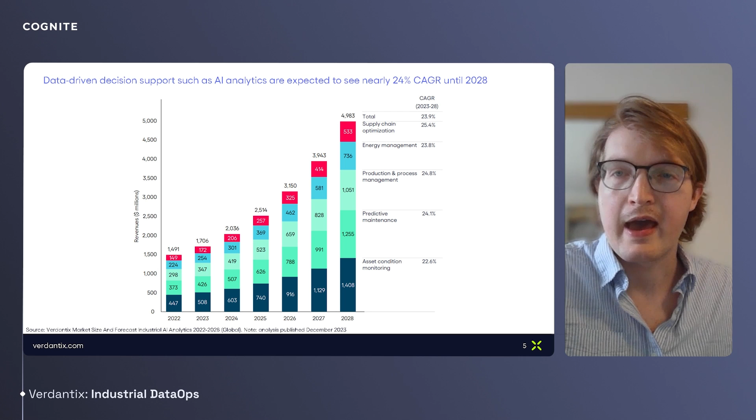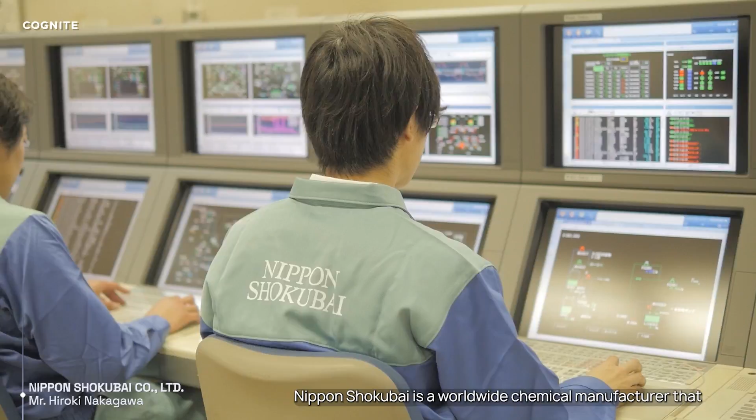NIPPON SHOKUBAI is a worldwide chemical manufacturer that provides materials and solutions required by people and society, from super-absorbent polymers, raw material of detergents, automotive paints, and other consumer goods to next-generation batteries and health and medical materials.

In my current role, I am responsible for promoting digital transformation at NIPPON SHOKUBAI.

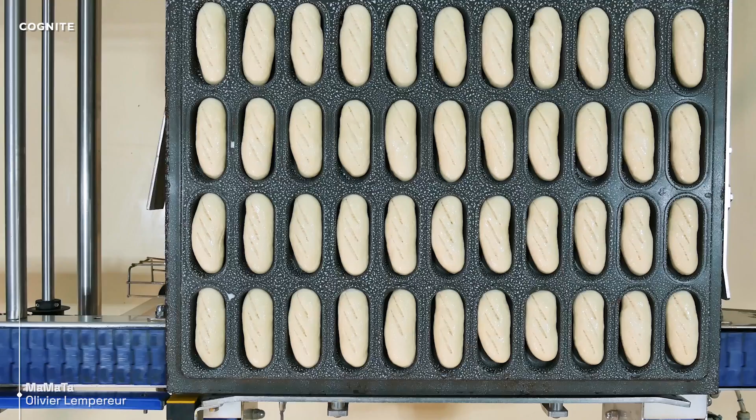MaMaTa is a subsidiary of the same group as Mecatherm, a leading OEM in the industrial bakery sector. So they are our main focus to date, and we provide them with our tool to help them better understand their equipment and as a way to stay close to their remote clients.

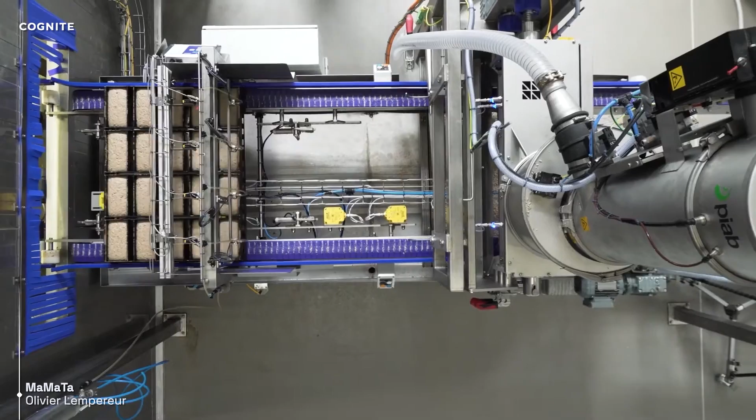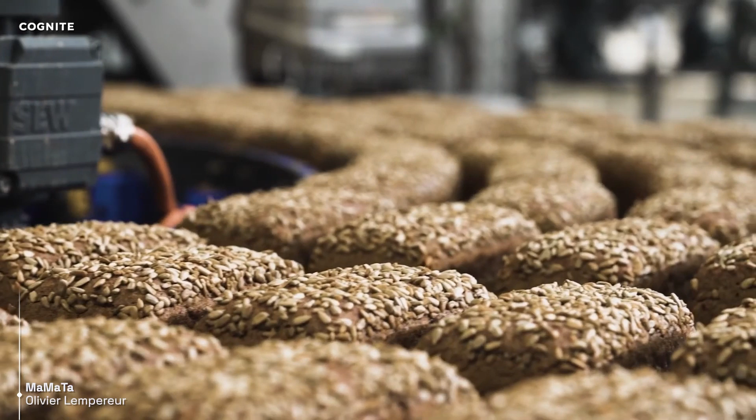There's a saying that in every machine, about 70% of the functions have been reused from other equipment, and only 30% are very specific. Our objective is to take that into account so that the knowledge we create about a machine, a function, or an actuator is immediately linked to similar assets, enriching the whole knowledge graph.

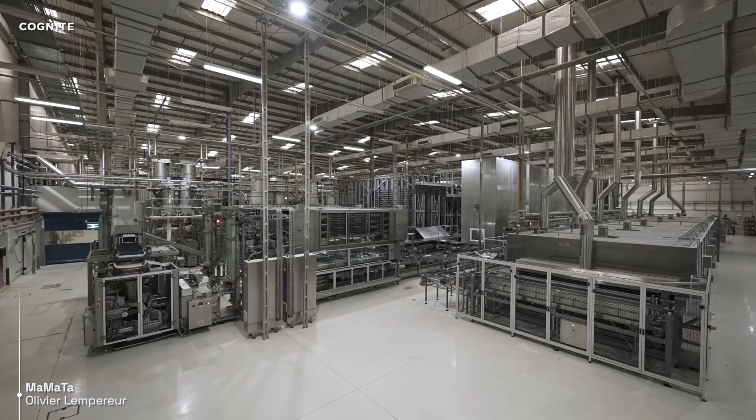As an example, a baker would be surprised to learn that a glass wool insulation panel is also processed using proofing and baking. Therefore, every machine we connect should be considered a modular, configurable system.

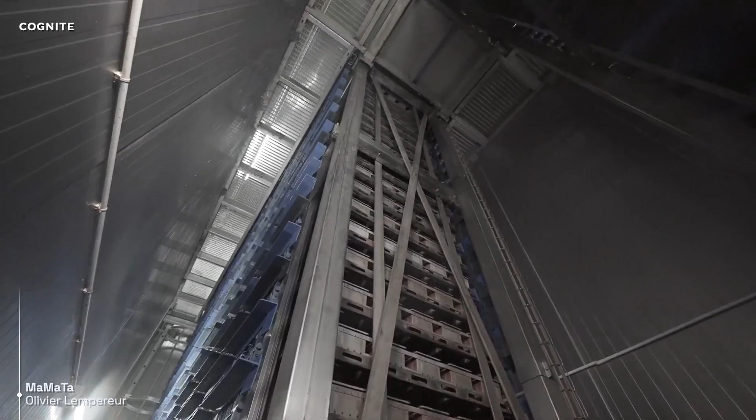Connecting new equipment should be a breeze, and valuable information should start flowing immediately, especially for the standard components or functions.

To meet our objective, we explored various platform solutions, but we encountered several issues. Many options were no-code platforms that were not powerful enough or simply not designed with industrial use cases in mind. They also lacked flexible data modeling tools, which was a significant drawback for our needs.

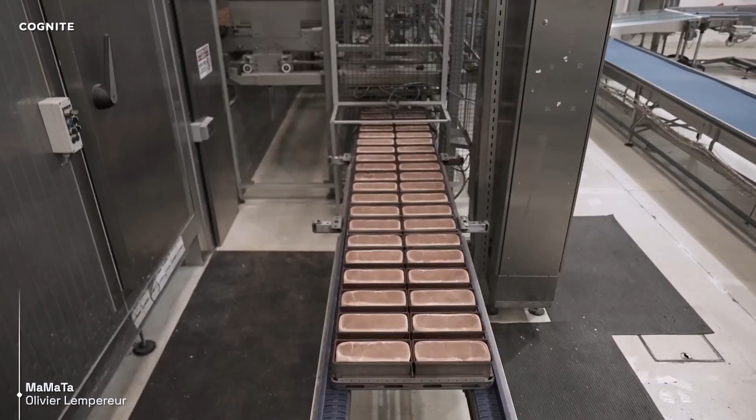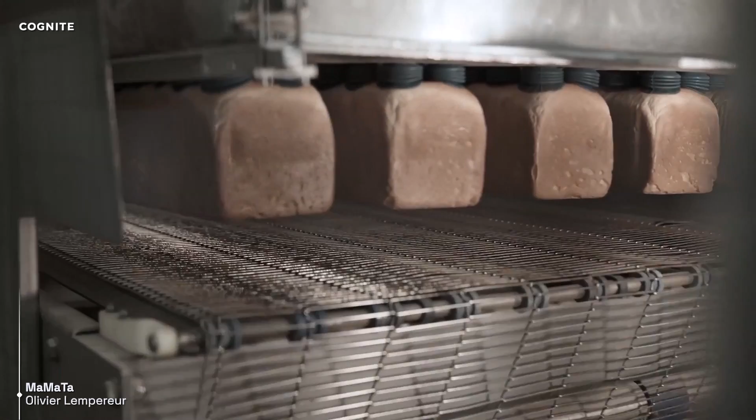Additionally, connecting new equipment or a new production line was a very tedious and time-consuming task. The data processing capabilities were often limited, usually just offering a basic functional library. And finally, there was no room to convert shop floor stories into structured data, which is essential for our operations.

To address the challenges I described, we decided to choose Cognite Data Fusion, and I'll share with you some of the things we have done with the platform. So let's begin with the data modeling service.

Data modeling is important for MaMaTa because it allows us to create a place for every piece of data we collect, be it a time series or a piece of knowledge shared by a subject matter expert. With our previous platform, we were limited to sites, lines, and equipment to store all the data. Now we have a much more complex data model, and you can see that we can store very detailed information about a specific equipment, but in a standard way.

For example, we have our own definition of a process equipment, which for us is always made of a conveyor part and a process part. And here you can see that we model things up to the motor and its components.

Now let me show you how we work with Cognite charts. Once the data is stored in the data model, we begin to work on the understanding of that data. For that, we use charts. It's like our prototyping playground.

For example, on that stone oven, we can see that the cylinder on the left-hand side of the conveyor, which is used to tension the chain, is not behaving as expected. It should be as smooth as the one on the right-hand side. A subject matter expert would tell us that it is because the chain on that side is becoming stiff due to a greasing problem.

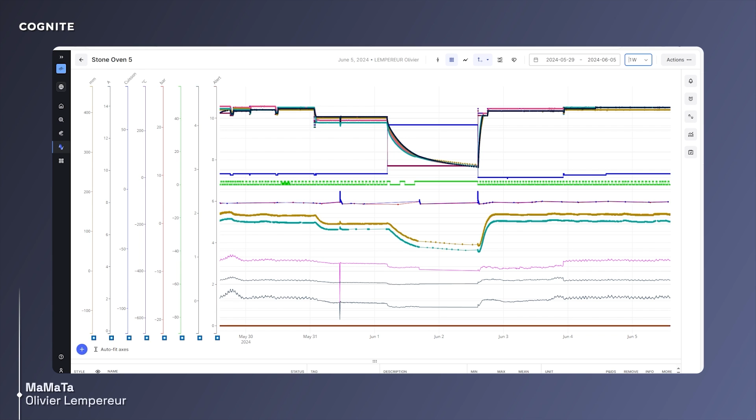On that similar oven, I'm surprised to see that the motor current is oscillating. But I'm curious to find out at what frequency in order to understand what component is involved. For that, let's move on to an app that we developed on Streamlit inside CDF.

In this app, we can calculate the fast Fourier transform of our oven motor current. It is valuable for us to be able to use this advanced diagnosis tool that we created without ever leaving the platform. By the way, we can immediately see that things were different at the beginning of May from what they seem to be right now.

We would have to investigate with the expert to what we could link the increase of amplitude that we can see, but I can already say that this will be interesting to monitor in the long run.

So we will work on packaging that as a function that will run on CDF. It will eventually generate its own time series and, if necessary, also some alerts that would be sent to shop floor workers through our customer portal.

Finally, let me show you the front end that we built to deliver actionable insights to people at MaMaTa and on customer factories in a user-friendly way. On that portal, we can present the same data, but in a very refined and contextualized way.

For that, using the API and the SDK available was a game changer. We are able to easily pull data from CDF to visualize it on the portal and create a compelling user experience.

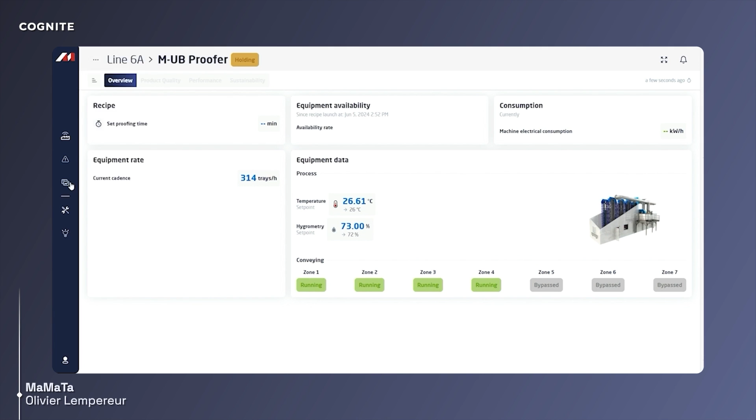The alert that we were talking about would end up here. Of course, most of the data we are collecting is also available. For an asset like the proofer, the key indicators can be seen at a glance.

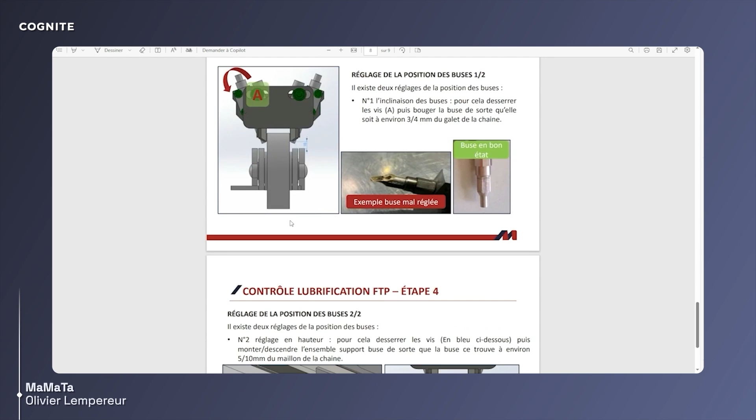But the main point for us is that everything from collecting a new measurement on an asset to the data being available through the API is very quick, so we can answer a new need expressed by one of our customers in a very agile way and improve our solution rapidly.

So far, we've managed in 3 months to get from no platform and no front end to a first site connected and its data available in the first version of our customer portal.

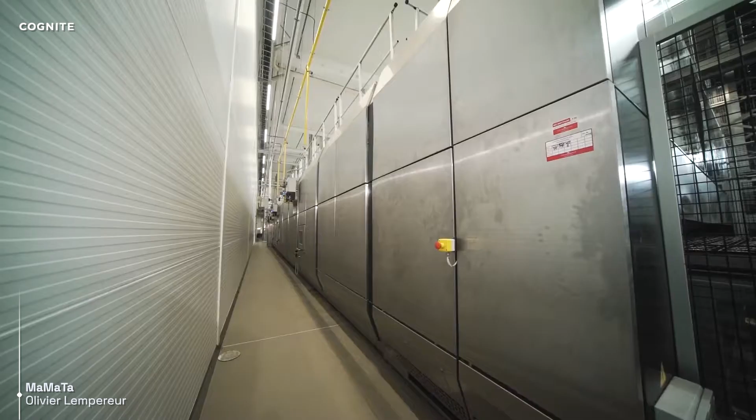Everything is now in place to accelerate, connect more assets, and develop the whole solution to offer even more value to people at MaMaTa and on bakery production sites. Being able to offer our digital solution to prospects has already allowed us to defend our margin in a recent contract win.

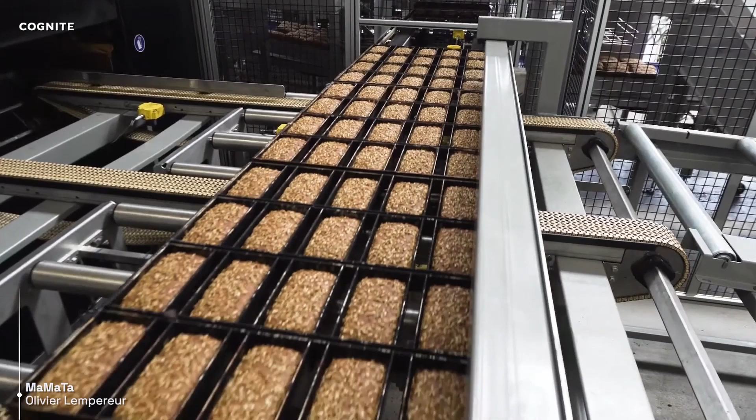We also want to take advantage of the GenAI capabilities in CDF to present knowledge in a more natural and intuitive way. One thing I envision is dynamically adapting the content based on the user's profile, tailoring it to their level of technical expertise.

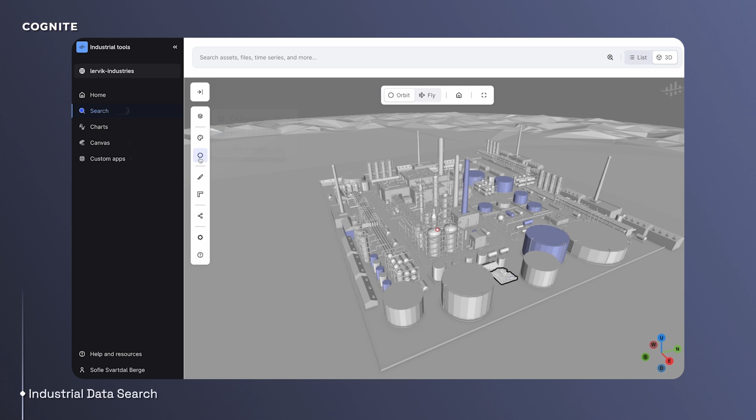You can also highlight contextualized assets in 3D. Clicking on any of these contextualized objects gives you a summary card, and you can either jump into more details or also view side by side with the 3D model, for instance, the associated P&ID.

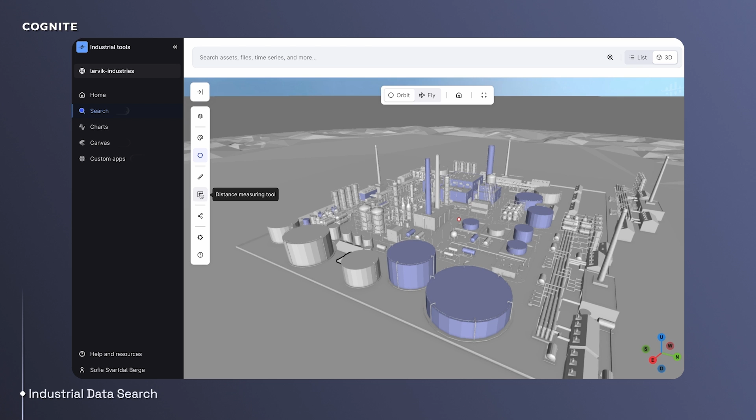Other functionality includes using the measurements tool to perform spatial analysis, like analyzing the need for scaffolding to reach a specific area, or whether there will be room for new equipment you're planning for. You can measure point-to-point, multi-point, area, and volume.

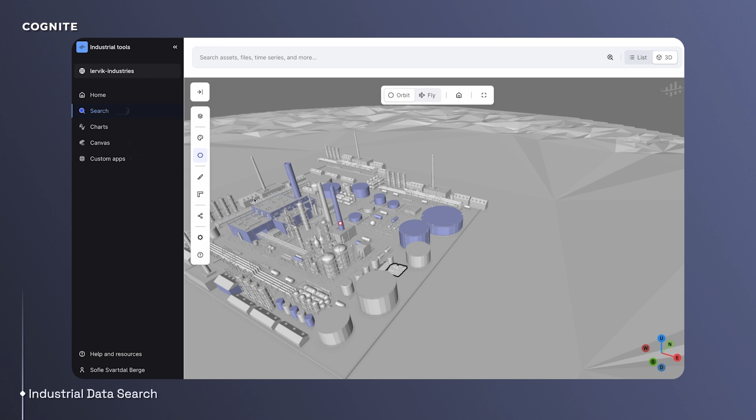Lastly, we can't miss covering how we can use color overlay functionality. With color overlays, assets in 3D are colored based on threshold rules, single or nested, that you have created to monitor various equipment or operational conditions, like the level of corrosion or pressure changes.

When you turn on color overlay here for monitoring of compressor health, it will highlight any objects in 3D that are violating that threshold. And we can see here that there's one compressor that needs attention.

For troubleshooting, you might also want to access this data out in the field from a handheld device. And you can. Similar to the desktop experience, Cognite Data Fusion enables field workers to find and interact with the same set of contextualized data from their handheld device, bringing more efficiency and ease of work out to the field. On your handheld device, starting with the search mode, we can look for the same first stage compressor using the search field.

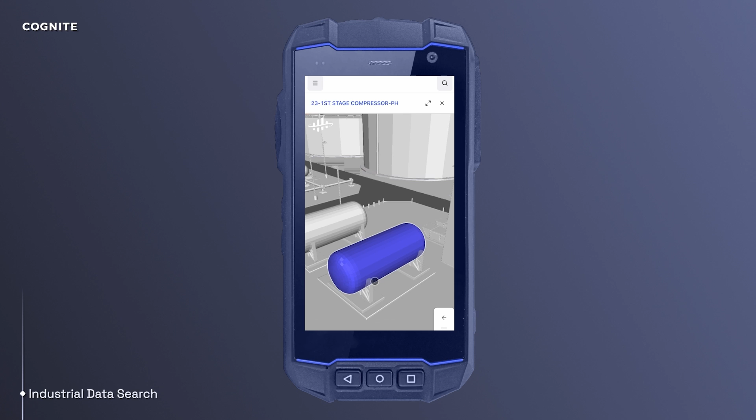Finding the equipment, you can see associated data, including interacting with this high-performant web streaming of contextualized 3D models that lets you as a field expert fully interact with 3D content, even on low-powered devices, making navigating unfamiliar areas and inspecting hard-to-reach equipment much easier.

So while being out in the field, you as a field worker can inspect this first stage compressor, and you can even add an observation tied to it if you find something interesting worth noting.

Then, going back to the desktop view, we can open up this associated data to the compressor and look for historical data to help speed up the root cause analysis of the current threshold breach. In files, we see this previous root cause analysis performed where the identified cause was loss of containment.

We could use Copilot to summarize this root cause analysis file or ask questions about it, but for this sort of analysis, it can make sense to pass it on to the reliability team for further investigation through the collaborative industrial canvas.

To summarize, with the ability to find industrial information in just seconds, you and your team no longer need to go back and forth between the office and the field, navigating across different sources and systems, or reach out to different people and teams to find and validate information.

Similar to our customers, your frontline can save hundreds of hours searching for information. This can lead to as much as 20% increased productivity by letting them focus more of their time and energy on critical tasks, problem solving, and other high-value activities.

Now, let's continue this root cause analysis journey and learn more about Industrial Canvas. Industrial Canvas helps users explore, interact, work, and collaborate on industrial data in an intuitive and unique way.

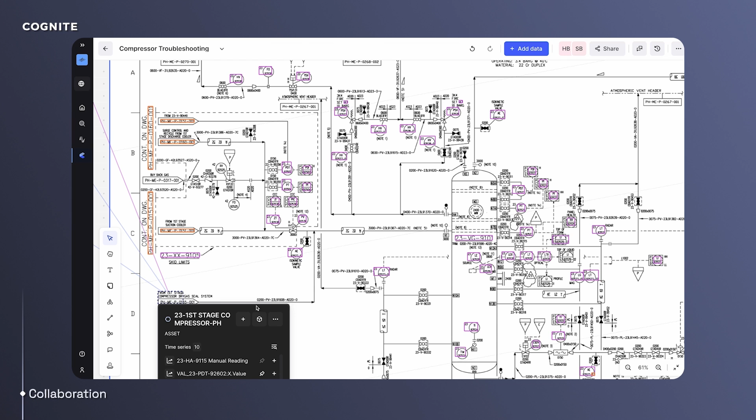But it's worth noting that this information is not just dumb, static information. For example, this P&ID here is actually interactive. When I click on the compressor in the P&ID, I can see related data, or pull in a 3D model.

Now I can check in 3D the potential spacing constraints of work being done around it, or what have you. Or, for example, I can look upstream in the P&ID, and I know this particular process safety valve has caused some issues, so maybe I want to pull that into the canvas.

So again, the point isn't the exact data or the exact flow that I'm walking through, but rather that no matter what information I'm looking for, I'm always one click away from being able to find that information in context and use it in my workflow.

Moreover, things like the time series data we see here, it's easy to think this is just a static chart that's been added, but I can interact with this information to do a little bit deeper investigation. Cognite also supports further analysis of that time series data through our tool, Cognite Charts.

So now, stepping into our charts tool, we create a new troubleshooting chart for my compressor and bring that information into a rich interactive display like this. So now we see that exact same time series information in Cognite Charts, where I can, of course, take a look at the data points relevant to it.

I can also do a bit of basic out-of-the-box profiling of that time series data -- the gap length, the time series spread, etc. Information that's very relevant when investigating the data points.

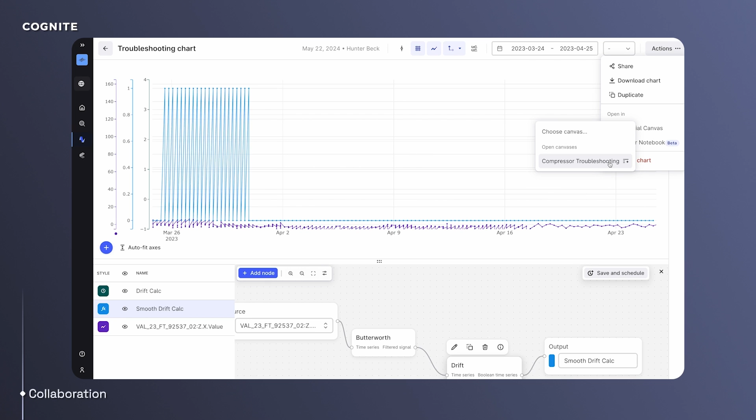And lastly, of course, I've been doing all of this work in Cognite Charts, which is integrated back to Industrial Canvas. So now I can add this exact same chart back to that same compressor troubleshooting canvas I was working on earlier. So now we're going to jump back into that.

So now we can see that we've actually brought that exact chart with all of the details and calculations into the Industrial Canvas as well. So we're completely closing the loop on the analysis of being able to start with an open-ended question, dig into a bit more of the time series data, and then provide more context back into the canvas as well.

Lastly, of course, it doesn't have to just be information around that equipment that's relevant to the troubleshooting process. We can also look at other relevant information in the organization. For example, maybe my company has some descriptions on common causes of failures in process safety valves, so I can bring in that document. Again, this is completely proprietary internal information, and it's 74 pages, which I could read through if I wanted to, but I can also ask generative AI to do that on my behalf.

So I ask here, how to troubleshoot a PSV. Generative AI will read through that whole document and actually give me a summary of the answer to my question—how to troubleshoot that PSV, which it recognized was a process safety valve without me telling it, and give some hints as to how to do it.

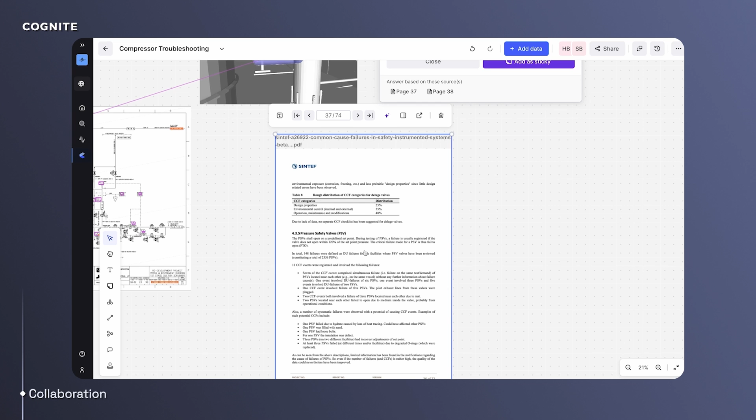But again, this is a safety critical system, so it's important that generative AI is showing its homework. So you can see here, we also give indications of where in the document it's getting those answers from, so that you can further assess that as an individual, and also look at other information that might be relevant around it. And of course, we're able to add that back as a sticky note to the canvas for future reference.

And you might have noticed that we kicked off this entire work in Industrial Canvas with a comment from my colleague, but it should go without saying that this entire experience is built to be a collaborative one that the entire organization or teams can work together to solve problems, including being able to ultimately share that canvas with individuals like my colleague Sofie did, or make it public for my entire organization to consume and use.

And of course, that also means that we have the ability to version control the canvas. It means we also have the ability to, for example, lock the canvas, so that when I'm done with the entire troubleshooting process, I can lock it down so it can be used for future reference when somebody's doing troubleshooting on that exact same equipment or on a similar type of equipment in the future.

What Industrial Canvas and Charts really demonstrate is that you no longer need to navigate through different systems and sources or documents, spreadsheets scattered across different teams, phone calls, and more. This is how intuitive and efficient the experience working with data for every industrial user should be, whether they're investigating potential equipment failure, planning for maintenance, or doing turnaround preparations.

Our customers tell us that Industrial Canvas and Charts have saved them many hours and even days on searching and creating insights, accelerating decision-making by up to 90%. And as you remember, Verdantix mentioned earlier that collaborating on industrial data and insights is really crucial when it comes to improving operational efficiencies. This leads to quicker resolution times to avoid potential unplanned downtime and reuse of insights across teams, all while fostering unprecedented levels of collaboration.

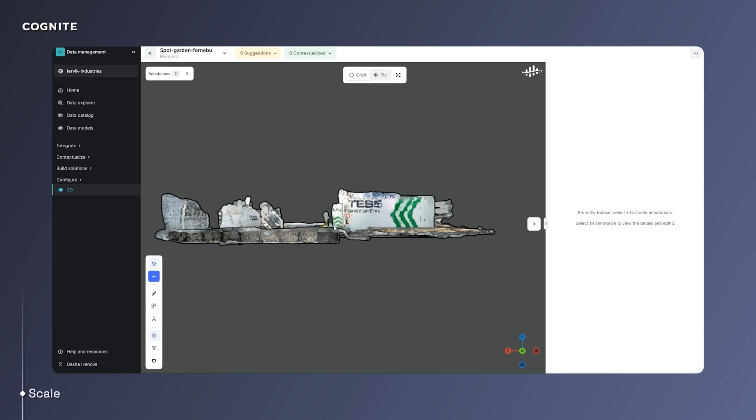We can now even contextualize complex, large point clouds so that you can build dynamic digital twins. These types of twins offer more flexibility compared to your traditional 3D model, especially for dynamic brownfield type facilities. Point clouds can provide highly detailed and precise representations of your facility, and most importantly, the spatial context of everything within it.

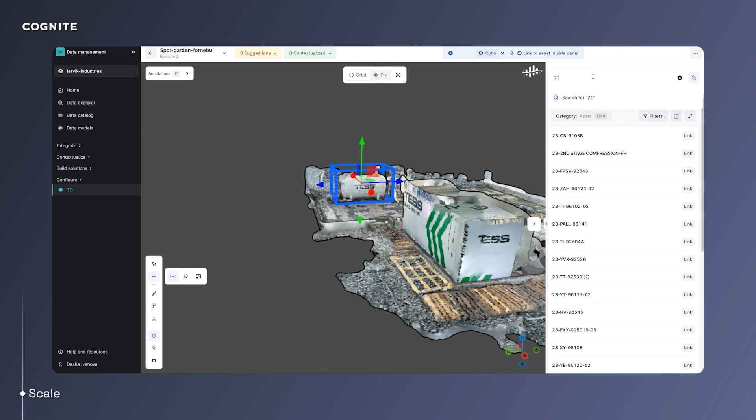Users can augment the models by adding new objects, annotations, or even comments to other users where necessary. They can overlay point clouds with 3D models or even photogrammetry. The beauty of all of this is that it's all contextualized and saved into the digital twin in one environment. These dynamic twins let users easily navigate relationships between different assets and the source systems.

In turn, this allows them to optimize workflows, asset performance management processes, and more. Cognite Data Fusion's robust data modeling capabilities can operationalize and scale hundreds of use cases, including machine learning and AI needs. We can craft niche workflows by choosing to build data models in the platform, or you can opt for out-of-the-box models provided by Cognite, which are industry-specific. Regardless, any model in Cognite Data Fusion can be modified and tailored to suit the needs of your equipment, site, enterprise, or use case.

Finally, Cognite is proud to say that we have well-documented APIs and SDKs. We want to enable our customers to leverage the platform for themselves. Whether they're building custom user interfaces or connecting to pre-existing apps or third-party tools, we empower our customers to consume data however their business demands.

Having a robust and scalable data ops platform like Cognite Data Fusion brings tremendous value to operational processes and asset performance while directly contributing to accelerating digital ambitions. For example, one customer delivering the same $500 million in profitability improvement just 1 or 2 years earlier led to hundreds of millions of dollars in improved net present value for the digital transformation program.